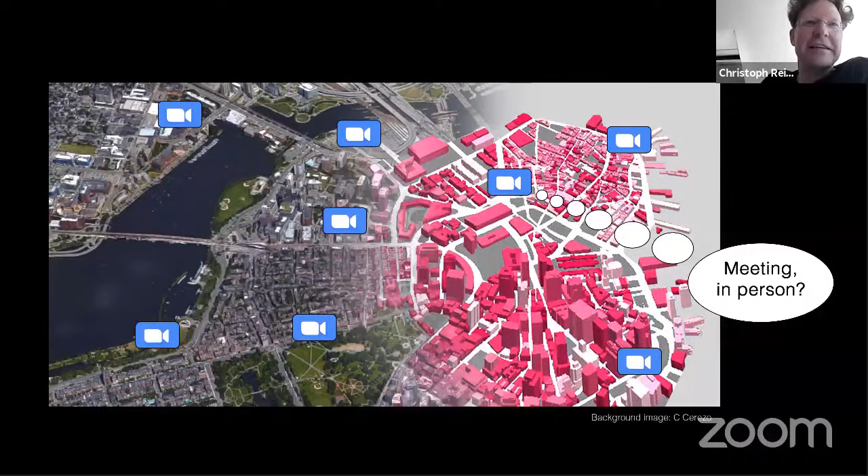This is a slide that I shared with you last year when we were all brand new in Zoom world, and now we have gotten painfully acquainted to being remote, but it seems like the end is in sight. So I just want to give a big shout out if you're in the Boston area to get the vaccine if you can. And for those joining us from elsewhere, I hope you'll soon be in a similar situation. Convince all your friends, your family, everybody to get it so that we can be back together in person.

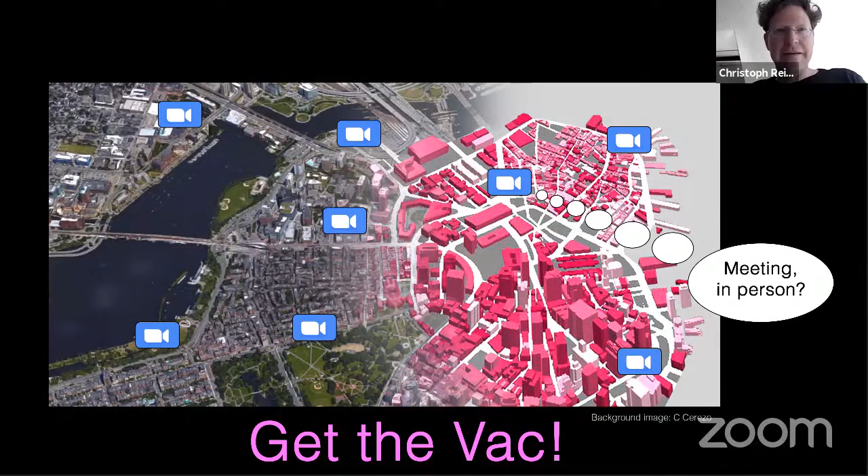The presentation was really great, Krista. I think especially after just teaching a semester class on tweaking, trying to model in EnergyPlus natural ventilation concepts, I know how painful it sometimes is to find out what the simulation assumptions of some tools are. So I think it takes a lot of bravery and confidence in building science to come up with these projects. It's probably 30% building science, 30% simulations, and 40% talking to people and convincing clients that this is actually working. And maybe what I want to talk about today is also about discussions of people having together.

I've called this presentation, this short presentation, Simulations in Practice. And I want to reflect on some of the things that we have learned by working with a group of practitioners and manufacturers on developing building performance software.

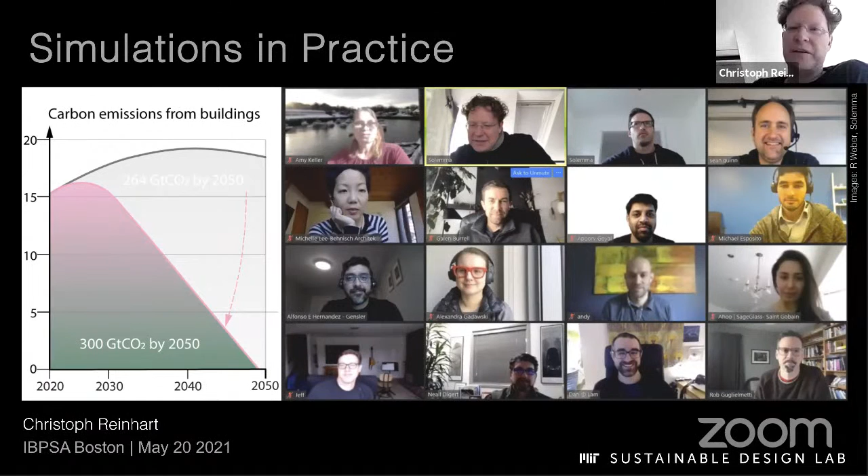Before I get started, I want, as always, to give a big shout out to my academic family, which is the Building Technology program at MIT, where both the two kind people that invited me are alumni from, as well as to our friends and co-software developers at Solemma, who are making the ClimateStudio software that I'm going to use as an example today.

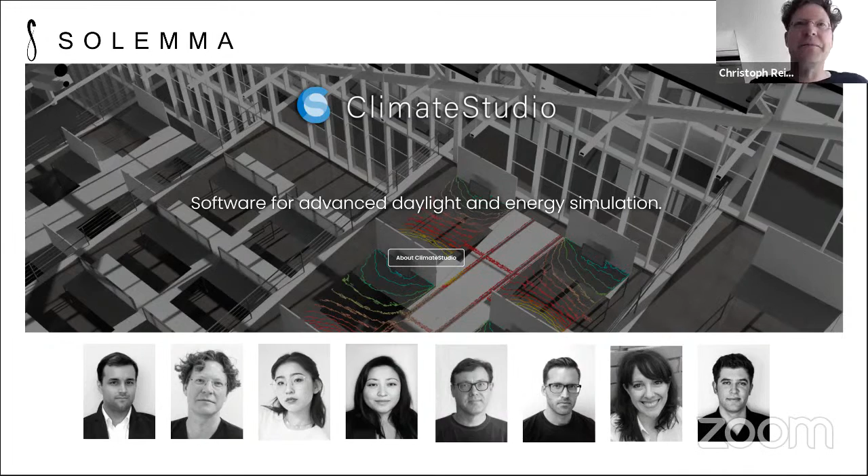So before I get started on that, some other thoughts that we have been working on during the last 12 months at MIT. The coming 3-4 slides, hopefully you haven't seen them. I think they're helpful if you work in the general area of resource efficiency in the built environment, trying to develop a more direct link between current debates on climate change and what we can do and have to do in our field. So very briefly, how do we want to frame that?

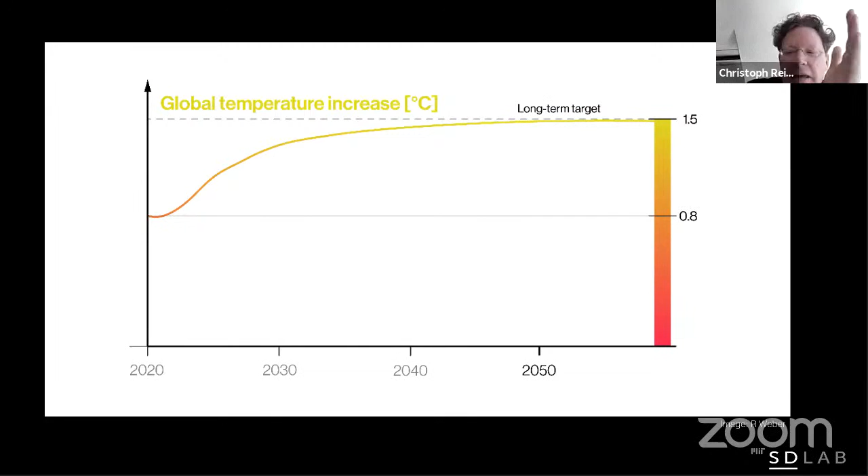If we want to keep global temperature rise under 1.5 degrees Celsius, the IPCC tells us we have 580 gigatons of CO2 left to burn. If you look at the recent news, there's a lot going on. Some large car manufacturers are promising that by 2035 they want to be carbon neutral. The Biden administration said that the electricity sector should be somehow carbon neutral by 2035. So let's assume we can claim more than 40% in our slow building sector.

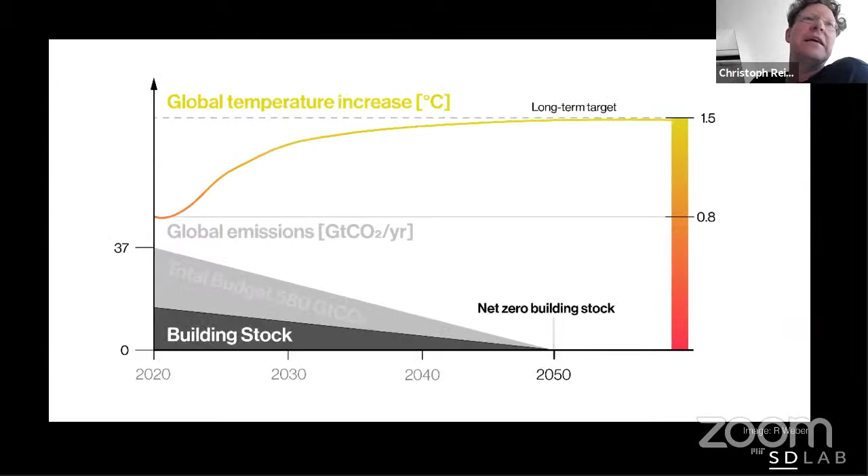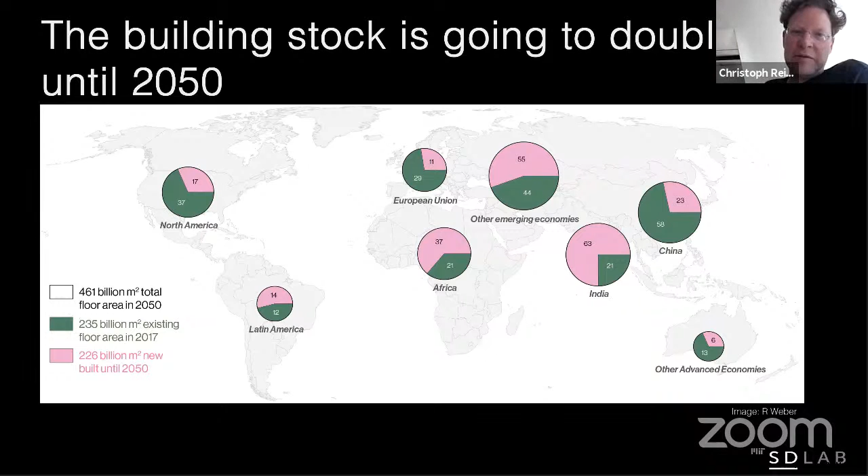Let's say we take half of this carbon. That means we have in total 300 gigatons of CO2 and 30 years left to make the global building stock carbon neutral. That's one idea. And then, of course, the global building stock is going to double by 2050. So we also have to basically reduce carbon emissions in the built world and create a net zero new world of buildings. This is a pretty simple model that we built here, just looking at the next 30 years.

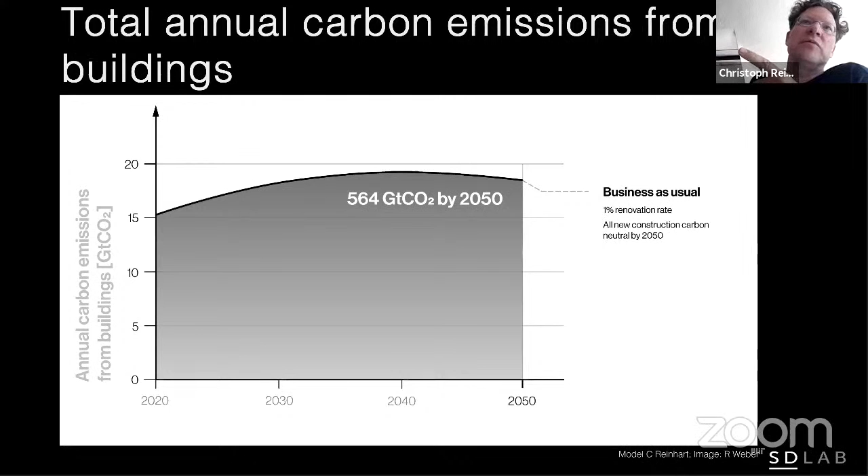If we keep our current global renovation rate at 1% per year, and we only take our time to make all new construction carbon neutral by 2050, we're going to burn through all the carbon that we have left as a global society by 2050.

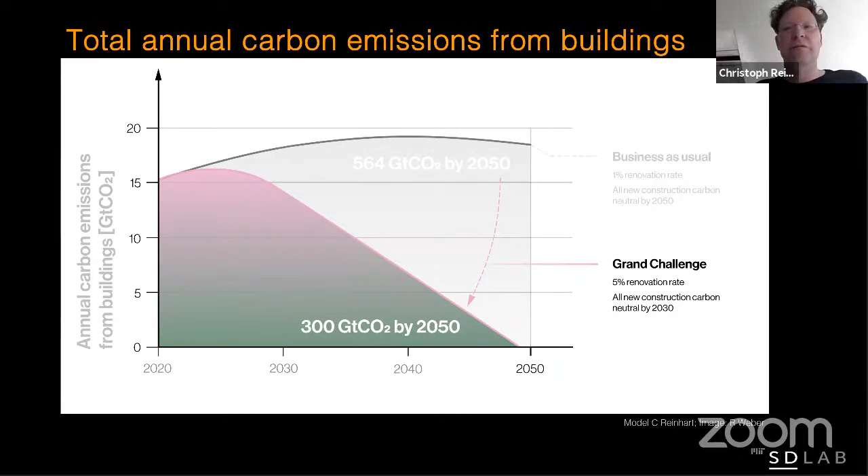Some key ideas or goals we've been working with: we really have to increase our renovation rate globally to 5% per year for all existing buildings, and we need carbon neutral solutions for new construction by 2030. This sounds like a pipe dream, but this is effectively what we need. Again, two numbers: 5% retrofitting rate, carbon neutrality for new construction in 10 years. So we've been working on both aspects, but I'm mostly going to focus on the second one, how to do carbon neutral construction in new buildings.

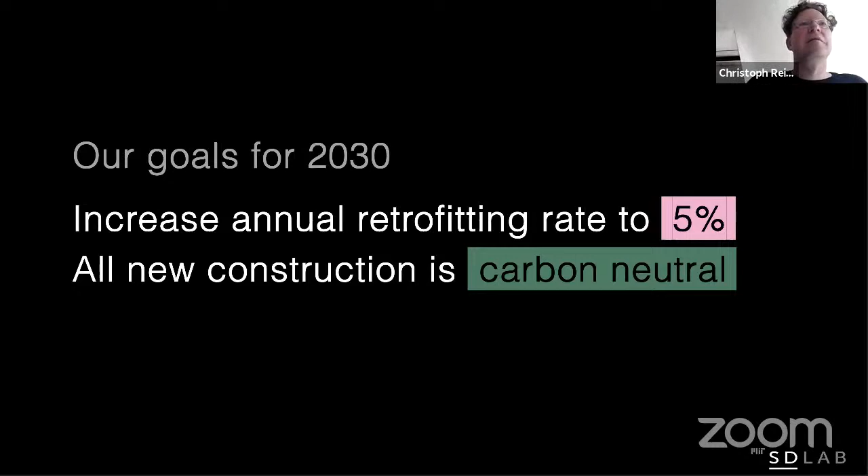But before I do that, I think especially being in the US, this is an exciting time. There seems to be a fresh, new natural wind going through the Department of Energy. If you follow what Secretary Granholm has announced, there's obviously a deep desire to make all existing 130 million US homes more energy efficient.

Our small contribution that we hope to do here is we developed this new web app called UBEM.io. If you just type this into your URL browser, you'll find it. What it does is greatly simplify the process if you have shapefiles and some zoning descriptions for your city, to build an urban building energy model of a small or large city.

And we've been trying to work with this with a number of organizations and cities throughout the US and internationally recently.

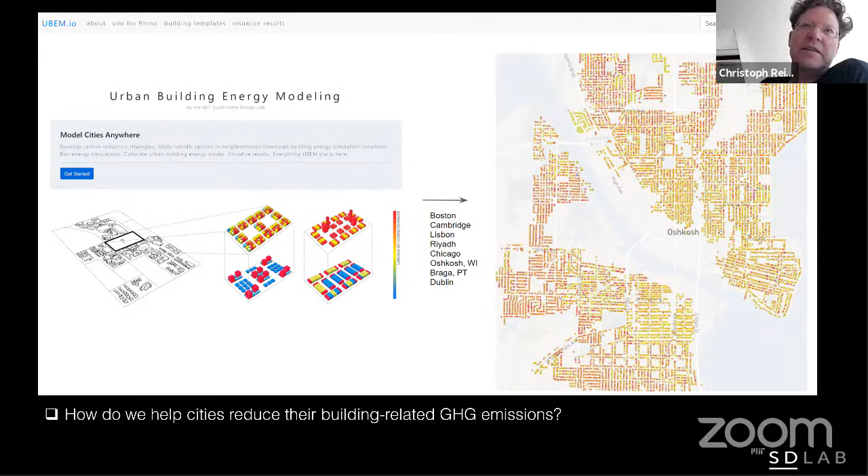Another thing I wanted to mention, for those interested, we've been working with some colleagues at MIT, Jake Jacoby and John Reilly, and at NBT, Zach Berzolla, on a white paper about how the stimulus bill fund could be spent on buildings to increase the global retrofitting rate. Our proposal is a 10-year program that increases, for single-family homes, the retrofitting rate to 4%, looking at how much this would cost if we implemented energy efficiency and electrification.

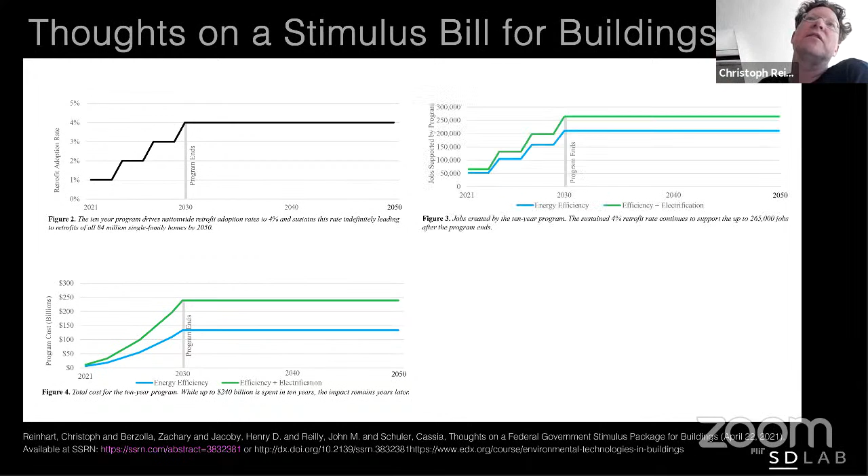We predict about $240 billion would have to come from the federal government to reduce the payback time to 5 years for all renovations. This would lead to about 250,000 new jobs directly in the clean tech sector spread across the US. That would hopefully help us bend the curve towards a net zero global US building stock, at least initially for single-family homes.

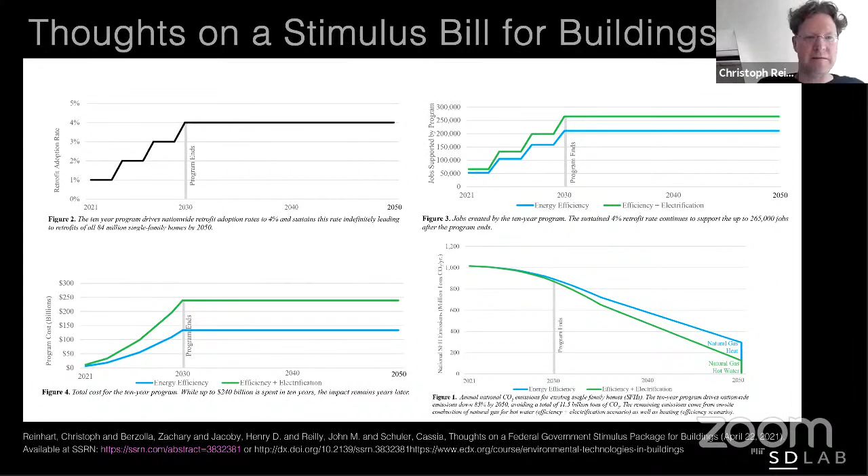And then of course, we want to expand this onto different building types. So now I want to shift gears and talk more about how we get more, or all, design teams to explore carbon neutral design concepts in new construction.

And here I'm going to go a little back — sorry if you've seen these slides before. This takes us back 10 years, when Holly Samuelson, A. Lantz, and I did a survey of about 100 firms, mostly located in the US and Canada. We knew that they were using simulation tools, so we wanted to understand how effective the use was.

So a very simple question: does the simulation change your design? What we found at that time, long time ago, is that when you have in-house modelers, the chances of having a big impact are actually larger than when you hire LEED consultants after the fact — which, if you think of the process, isn't very surprising.

We repeated this analysis with a survey 3 years ago with prominent US AEC firms. What we actually found — this firm has a pretty extensive sustainability group — was that the feeling was that only a third of the time do simulations really have an impact on design. And this is not for lack of trying, it's just because it's hard.

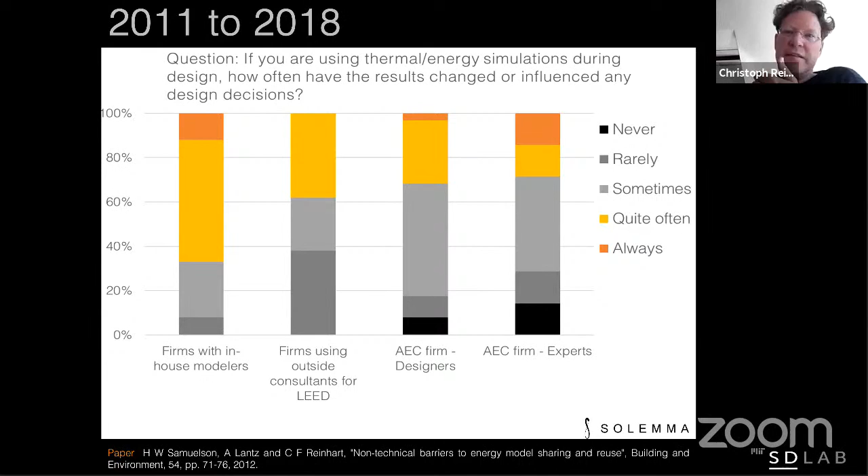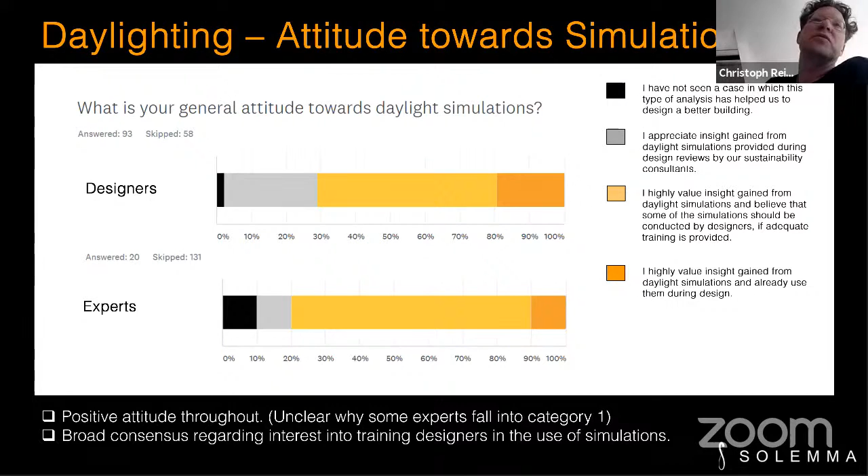We wanted to first understand if there's at least an interest in changing the profession and the way simulations are used in the process. So in that survey, we also asked the experts and designers within the same firm about daylighting: do the designers want to do that themselves? We got a clear majority vote for yes — there was confidence that they could be doing it themselves.

We also asked the same question for energy use, and I think that made a lot of the experts — probably including me — very nervous, because what does it mean to do an energy analysis? I'm going to talk about what I think designers could also do to elevate the discussions with their consultants in a little bit.

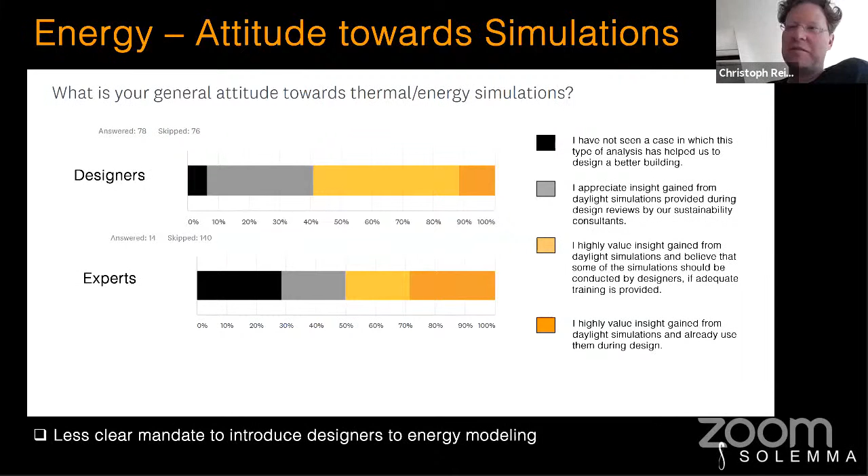So we took this as a mandate, and I talked about that last year when we had started. For the past 2.5 years, we've been working with this product advisory group, and I want to talk about this process a little more.

If you look at the firms, these are basically environmental consulting firms, prominent architecture firms large and small, and facade product envelope daylighting product manufacturers. The process here is that we have these monthly discussions with this wonderful group where we talk about what we have developed, but also what we should do next when it comes to changing and improving tools.

I think the important point is that not every analysis should be done. These discussions really help us to focus. It's my personal belief that when you develop tools in our arena, on the research side we should try everything and look at all kinds of different analysis modes. But then there's one point when we see, well, how mature is that? Should we add this as yet another gimmick or feature, or should we be more deliberate so that a larger group of people can understand how to make their building as efficient as possible?

So for me, this has been a very useful experience, just seeing, is anybody using a certain type of analysis? Is that a good analysis or not? I think we need to have a lot more discussions like this, and a forum like these local chapters where we have a more mixed audience of practitioners and simulationists.

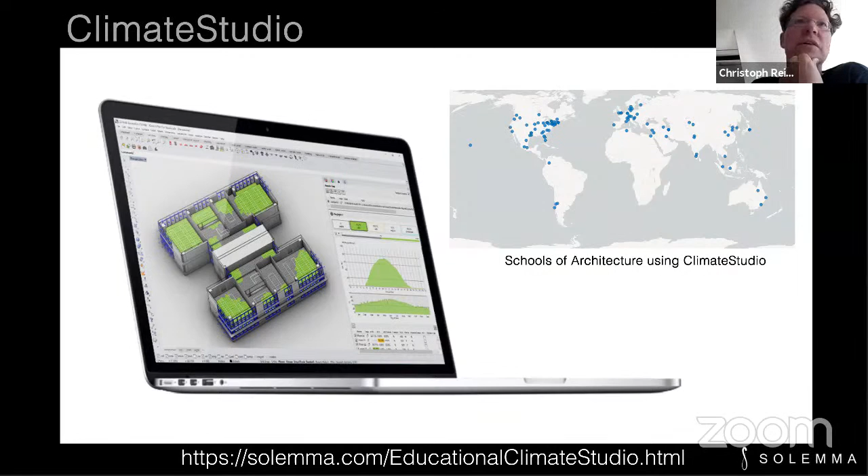Since we have this more powerful tool available, what I tried, especially last September, together with Alpha Asano, who was the TA for that class, this is an introductory class at MIT where we teach architects in half a term how to do daylighting and energy analysis.

We tried these 8 steps towards net zero. And what you read here is not very surprising: site selection, climate analysis. We start with daylight because that's a better form giver than energy, and then photovoltaics. I just want to go through the process using an example student project, done by Chris Allen and Alan Reinhard. The last name, there's no direct relationship here.

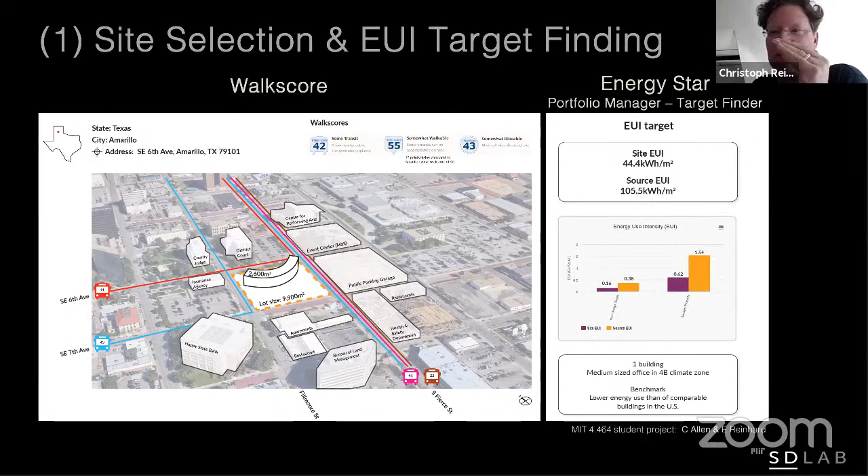When you look at the site analysis, of course you can start with, and architecture schools are very strong at that, looking at walk score, overall urban context. Then I think everybody can and should do very quickly an Energy Star Portfolio Manager target finding exercise just to get a sense of what is good, what is bad. And then we all want to do climate analysis.

I think a key idea is that you have to focus, don't try to do everything. But in this case, for example, they designed an office building in Texas, so the focus was really on solar gains management. That's kind of the theme that this building they designed picked up.

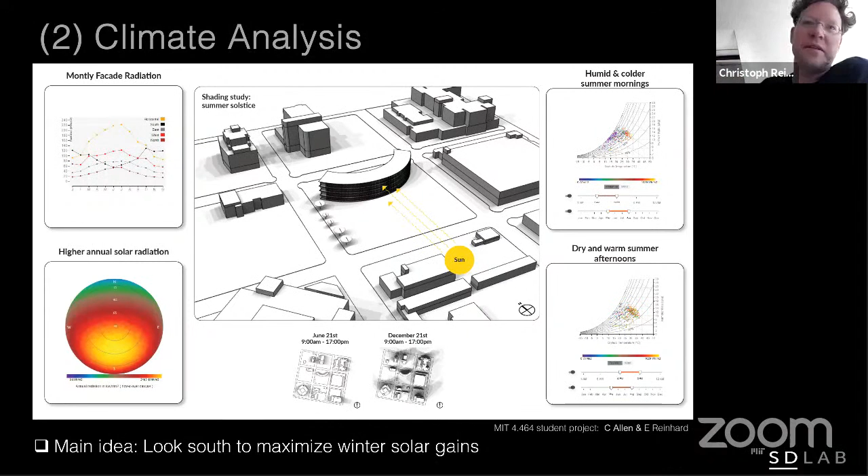Over the last couple of years, what has been really a game changer is that when you start doing a daylighting analysis, it's now so fast that you can actually do a daylighting analysis of a whole building. Not too long ago, when you modeled the building, you had to wait hours just to get anywhere, and that wasn't very conducive to design. Now with progressive ray tracing still based on radiance, we can basically look at a whole building and do real massing exercises. So it's not the simulation that limits us, it's how fast we can model something and our own imagination, which I think is great.

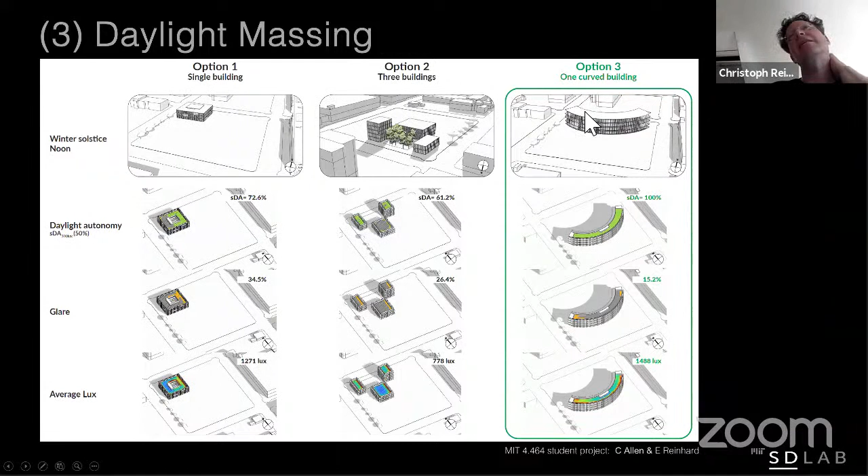So in this case, we are at a point where they looked at basically a closed block out of 3 buildings that formed an arc, and then the actual arc. And then they found that this building could be pretty close to 100% daylit.

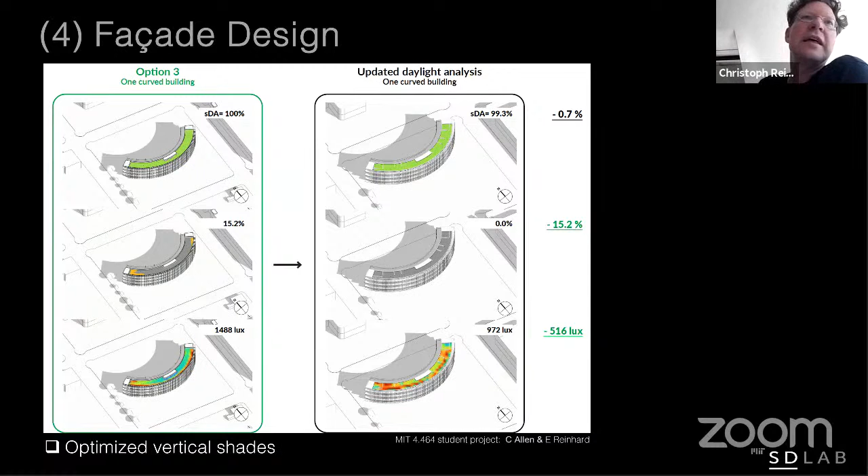Now I think something that is particularly exciting is our ability in general to look at glare in way higher resolution than we ever could.

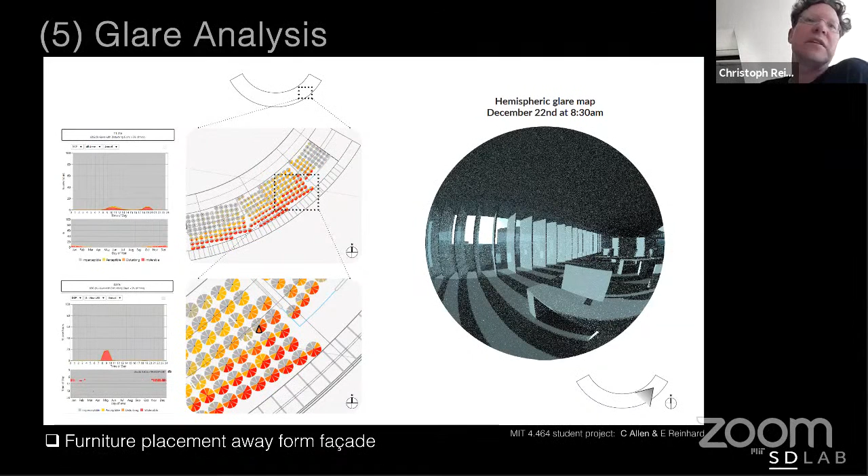So you can use this directly to combine your furniture layout with the glare potential or danger within a space. And then moving on, adding electric lighting.

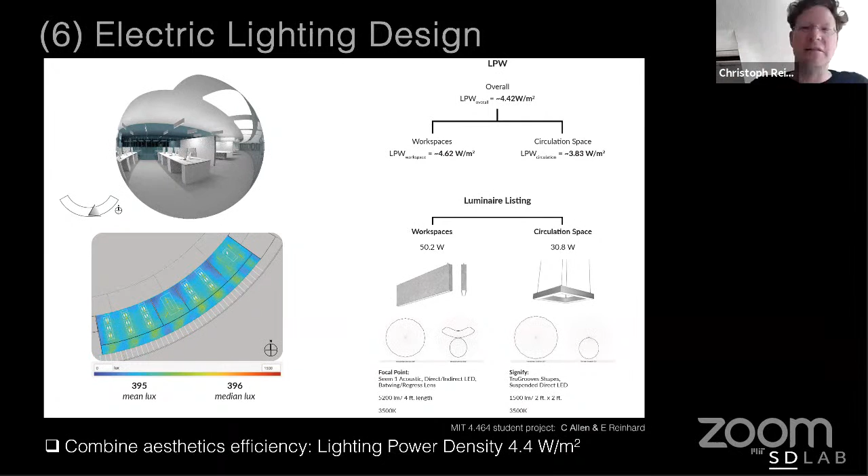By being able to link very quickly to existing manufacturer data, you can quickly get a sense of the current lighting power density. That's the big, nice success experience for any designer - when you compare the current really low lighting power densities that LEDs can achieve, you look like a hero compared to the relatively high lighting power densities still in the standards.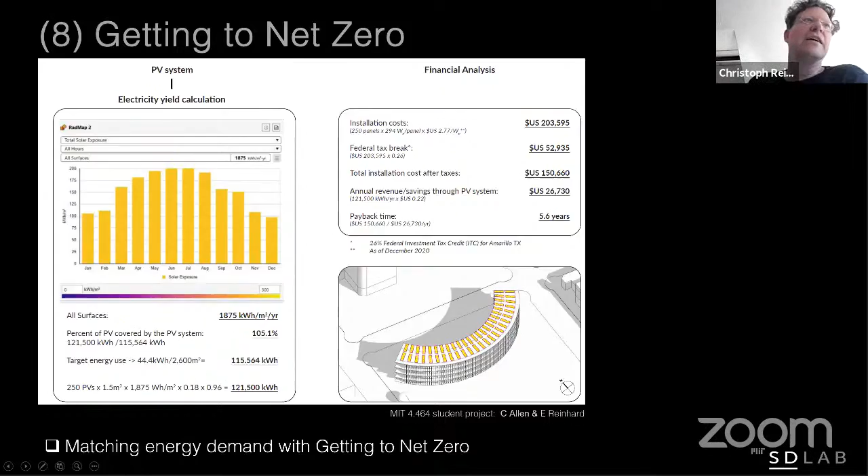So I'd love to - and we can debate this endlessly - how is it really that easy? All these questions involve extremely simplified HVAC models, and occupant behavior is more difficult. Just saying we have a very low U value doesn't mean you get that low U value - you have to really work it out on the facade. But I think the big benefit of this analysis early on is that it explains to a design team, to individuals, what's required to get to net zero. Probably this rough order of magnitude target you establish here for your envelope and HVAC system is representative of what you'll really have to do in the actual building.

And we should say it again and again - getting to net zero is really, really hard. These goals that we set for ourselves, even though we need to get there, there's a societal expectation that isn't easy to realize.

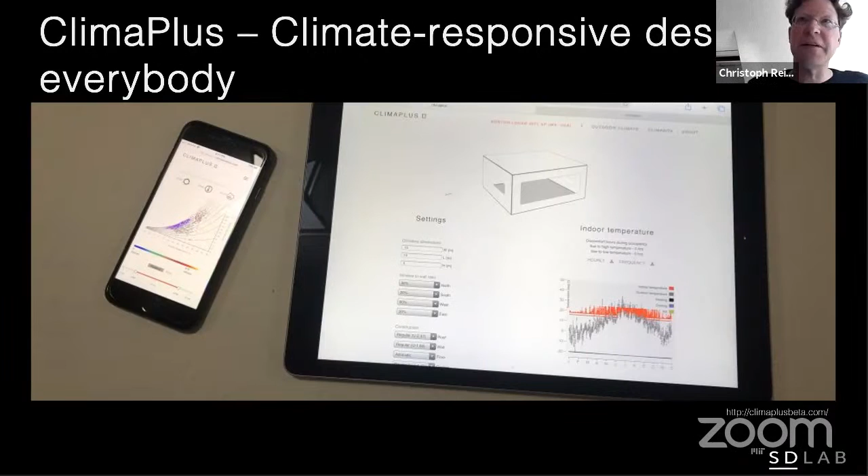Another aspect I wanted to talk about, which also came out of our product advisory group, is this question of reliable data. I think we and many others have, in a way, for a long time said we have some generic default numbers for certain simulation settings, but we leave it to the practitioners - just go talk to the manufacturer, which I don't think always happens, especially given the speed of the design process. So we've been trying to work very explicitly with manufacturers for clear glazings.

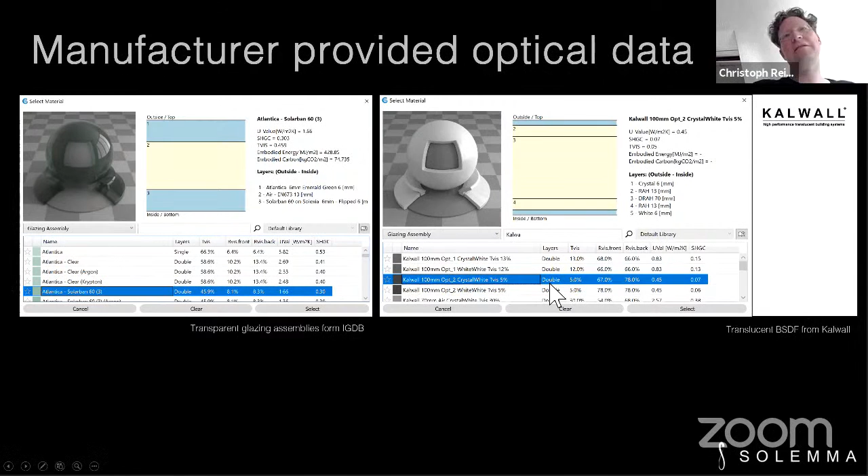For example, we are just linking the International Glazing Database. But for less common systems, we work with, for example, a translucent glazing manufacturer to, based on measured data, BSDF data that they had for their product, put this right into the software and you see directly the physical properties.

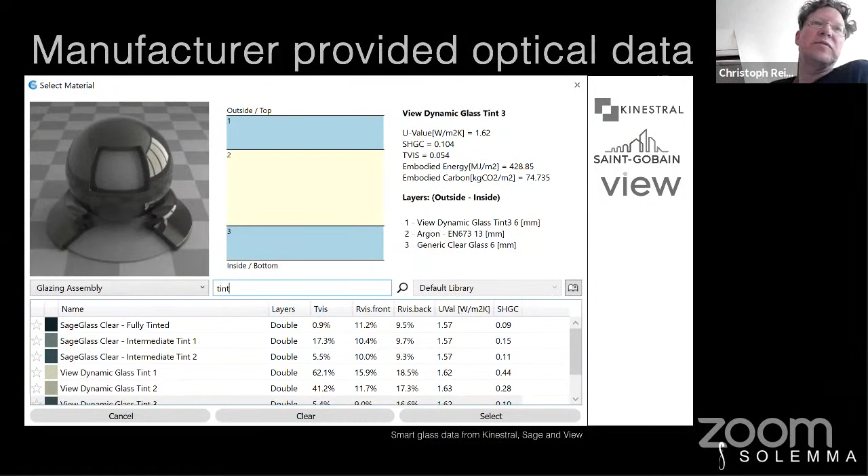Similarly for smart glass, which obviously had a lot of success stories recently, we've been working with 3 global manufacturers, View, Saint-Gobain, and Kinestral, on having all their products in there, which creates the ability for a lot of people to just test out these systems and see if they work effectively.

And now, brand new, something that we just put in is a tubular skylight. These type of systems, if you have seen them, allow you not only to daylight the space directly under a roof, but we can go 2 stories down.

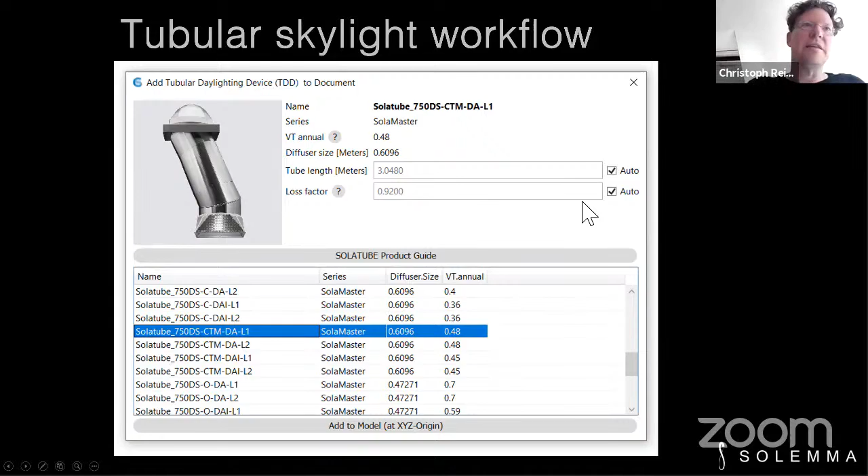So basically, in order to model something like this, John Sargent at Solemma developed a slightly different version of radiance, which basically takes a ray to a diffuser - we call this the split surface BSDF. Then we jump the ray somewhere else so that we can model this type of system, and so you can place it directly within your environment.

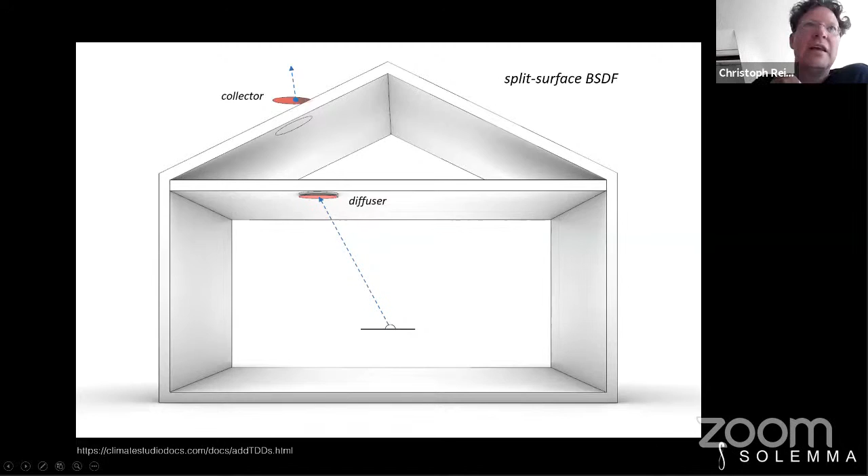Details are under the Climate Studio docs. And that allows you then, when you have a space like this, to get the daylight distributions for the whole year for systems like this in place as well.

So wrapping it up, in summary, I think as a field overall, we need to convince now building owners and design teams that they at least pursue carbon neutrality as an initial goal, because time is just running out. I think one of the methods we can contribute to that is just training the current and the coming generation of architects and climate consultants in these methods and tools.

And I think in parallel, to convince these owners as well to especially retrofit their buildings, we have to build political momentum, and federal support is needed to secure from the government to get these payback times to under 5 years. The idea here of under 5 years is that if you think of the first McKinsey report that told us building retrofits pay off, it's 20 years old, and still people need shorter payback times in order to implement these retrofitting measures in their buildings.

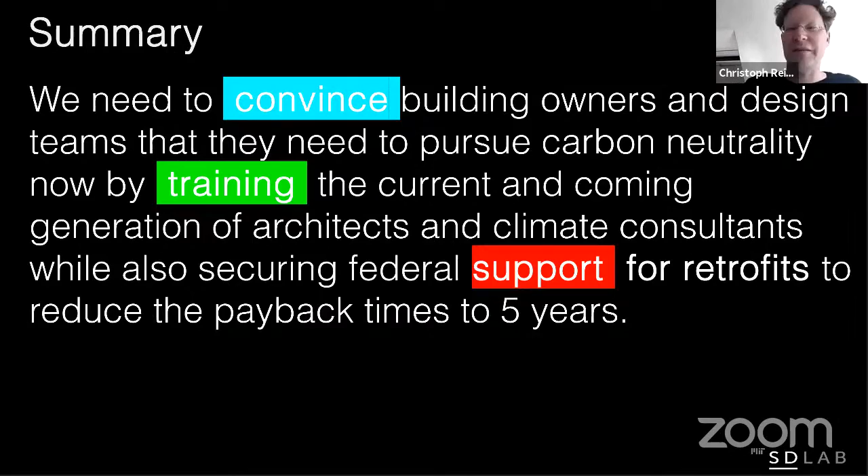And with that, I'm at my 20 minutes plus.

Okay, thank you so much, Christoph. It's always a treat to see what you've been working on, even in the 1 year, I think, since you last presented to the chapter. A lot of new developments.

Questions for Christoph? You can either raise your hand and speak them or type them in the chat here. Looks like we already have a couple comments. Is it possible to simulate manual shading control using Climate Studio?

You can model dynamic systems. Right now we have the ASE, the LEED daylighting control in there, but we'll be adding other manual controls as well. So the LEED control, if you're familiar with the system, basically says when you have for more than 2% of the floor area more than 1,000 lux direct sunlight, then the shading gets closed, and otherwise it gets opened. But you can also add your own schedules in there as well if you want to control these systems differently. I could talk for hours about what I think about this approach, but this is where we are right now.

The engine is EnergyPlus.

For targeting net zero, how about the contribution from the embodied energy? Another question. Oh, that's great. Yeah, no, I mean, due to time constraints, I haven't talked about this. This is, of course, a very busy field, and it's great a lot of people have been working on the data.